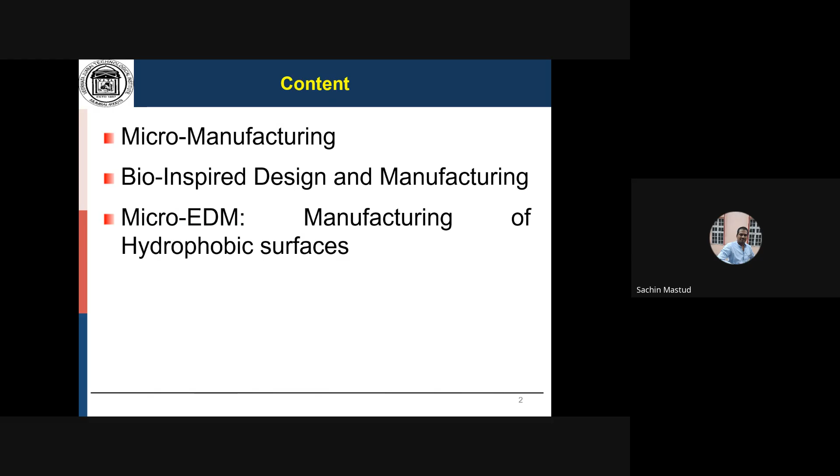So that's how there are many limitations of conventional machining processes, including that the tool must be harder than the workpiece, the tool must be very strong compared to the workpiece, and there is a relationship between tool motion and the workpiece. So the geometry you can achieve in conventional machining is limited.

Based on that, now we are moving towards micromanufacturing and 3D printing processes, wherein we have more liberty over the geometry we can achieve. Always remember that the tool is in contact with the workpiece, and that tool is under tremendous pressure and stress. You can see the machining force is coming on a very limited area. So although the force is high, the contact area is small, so the pressure is very, very high, and the tool has to bear this pressure. So always remember this, that the tool must be very strong, and it has to bear the pressure.

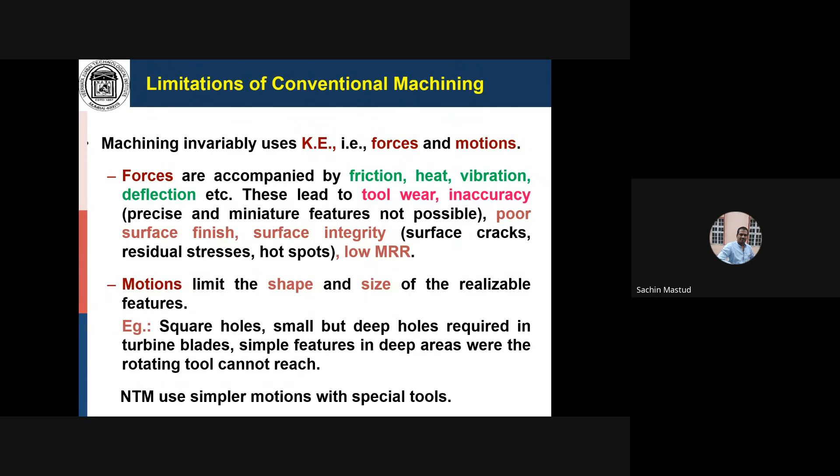If you see the development of manufacturing processes over the last 100 years, we can easily see that each 25 years our accuracy and precision is moving by 10 times. Before 25 years, if you could machine a part to, say, 10 micron accuracy, after 25 years it shifts by 10 times, so now we can machine the part to 1 micron accuracy. Each 25 years we are enhancing precision by almost 10 times - not 10 percent, but 10 times.

Considering that, we can now say that we can easily manufacture meso parts as of now. There is a trend towards the micro manufactured part. Now why micro manufacturing? Why aren't conventional processes enough? Why do we want to move toward miniaturization or micro manufacturing?

Always remember that if there is one mechanical system, and you can get the same function, the same output from a micro manufactured product or system, why would you invest more material in larger systems? For example, if there is one motor, and the same output is given by a small, advanced motor, why would you invest in the large motor, where you save more material and reduce manufacturing sequences? If you can reduce it, always try to reduce it.

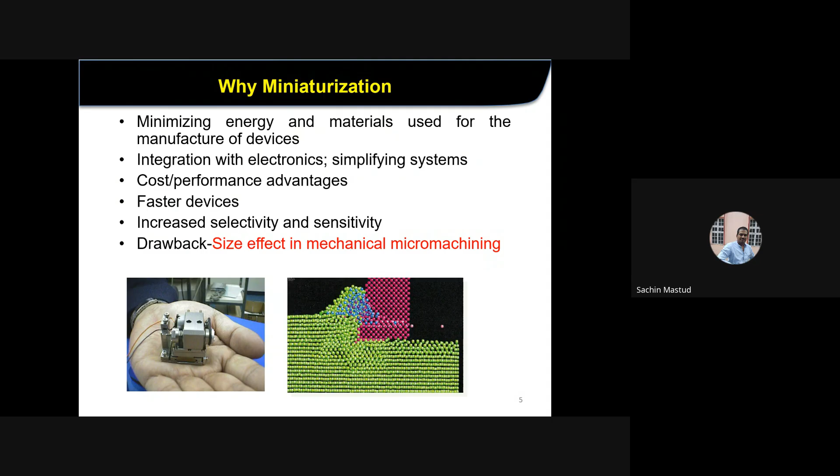Remember, tool size is already reduced, and the amount of energy required is increasing, so it becomes more challenging, because as tool size is reduced, cutting forces increase due to the size effect. So the first important challenge in micro manufacturing is to create tools which can sustain these cutting forces. That is the challenge, but if you can overcome it, the benefits are greater.

So now you will ask, what are the micro manufacturing processes? As such, there is no separate classification of micro manufacturing processes. Whatever process we've been using over the ages, if you scale it down so it can remove material in microns, that would be called a micro manufacturing process. There is no separate branch of micro manufacturing - whatever we are practicing, you just have to scale down the process.

Scaling down the process means the impact or mechanical energy during the process is reduced. For example, if you are turning a large part on the factory floor, if you reduce the depth of cut to less than 999 microns, it would be called micro manufacturing. There are no separate processes in micro manufacturing - only the size of the feature being machined is less than 999 microns, and that is called micro manufacturing or micro machining. So the general classification is macro fabrication or machining, and micro fabrication. Within micro fabrication there is micro machining and micro/nano finishing processes.

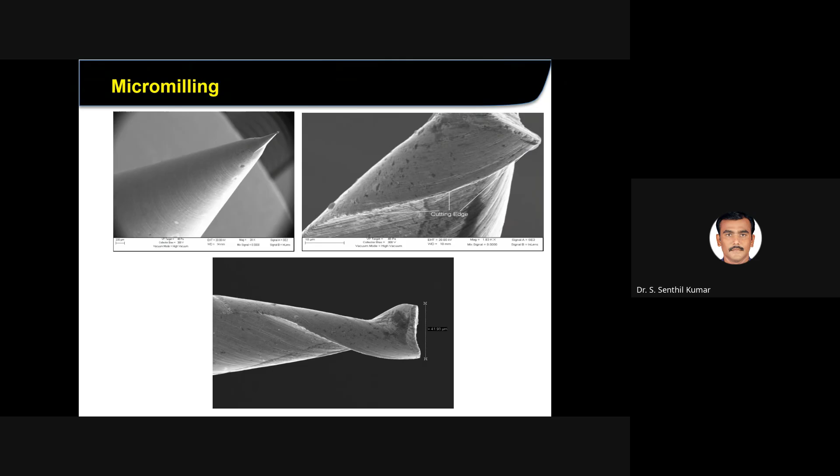So as I mentioned, the foremost important challenge in micro manufacturing is the usage of the tools and getting those tools available at your facility. As of now, we are lucky that these tools are easily available in India. 10 years back, we had to import those drills from Singapore, and the size of these milling cutters and drills is so small and so expensive that half of the drills would break in transit only, because they are so small.

Someone has unmuted. Can he or she mute? Yeah, I've taken care. Dr. Sachin, you proceed.

Okay, so that is the first challenge. The image shown here is close to 40 micron, correct? The bottom one is actually a milling cutter. It's 40 micron, and you can see that the flutes are machined on the 40 micron. 40 micron is half of a hair size. On half of the hair size, flutes are machined, and now you expect that this fellow will cut the metal. That is more challenging again.

Another challenge in building micro machines is how we normally calculate the RPM required on the machine. For example, if you go to the workshop and carry out a turning operation, how will you evaluate at what RPM the workpiece should be rotated? You will evaluate that based on the simple formula, V = πDN/1000. V is the cutting velocity. For carbide and mild steel, let us say the cutting velocity is 100 meter per minute. Based on that, you will evaluate the RPM.

Now, conventionally, let us say that for turning the 10 mm workpiece, the RPM would be around 3000 RPM. But if you reduce the drill size by 100, your RPM will obviously increase by 100, and it will become sometimes 2.5 lakhs RPM, which is not technologically feasible. It means that you will rotate this drill at 2.5 lakhs RPM, correct? Which, as of now, is not possible.

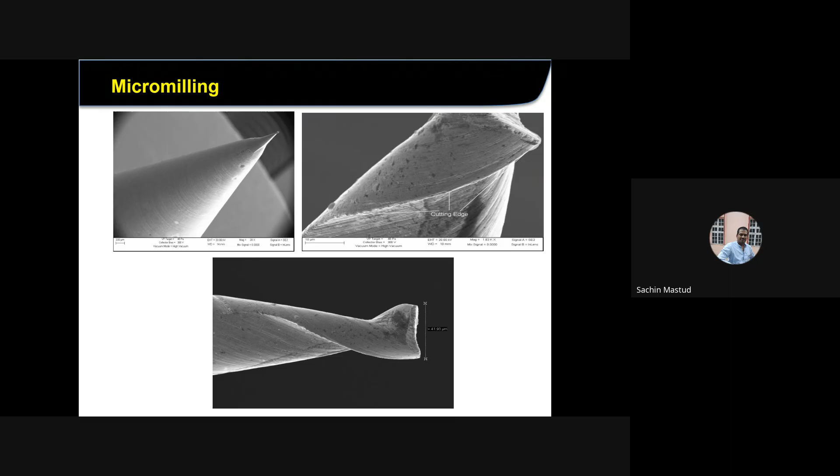Irrespective of those challenges, there is a good thing that in India we are now manufacturing the drills or the milling cutters. There is one company in Himachal Pradesh. It is Axis Micro-tools. Axis Micro-tools has developed the capability to manufacture this drill in our own country, and that's how the cost of these drills is now reduced. Remember, a drill size of around 80 micron can be easily manufactured nowadays in India, which otherwise we had to import from Singapore 10 years back.

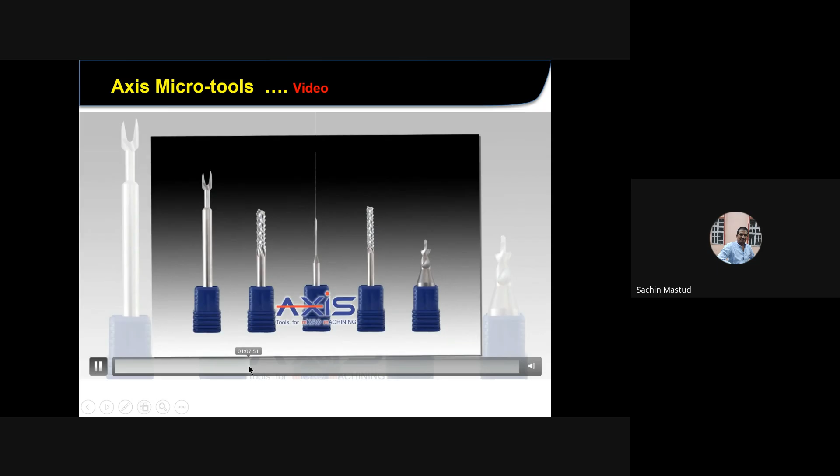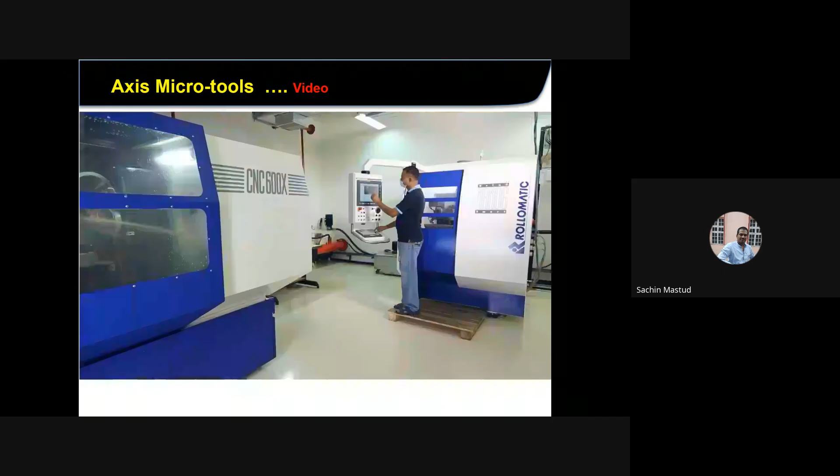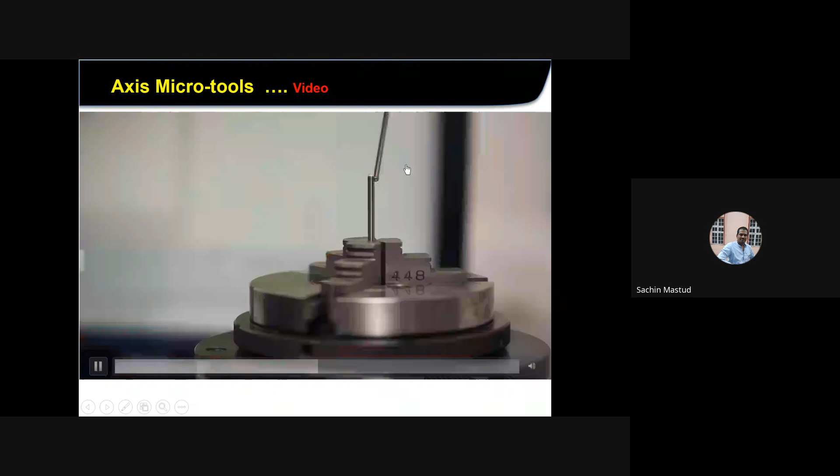So general manufacturing of this tool is always, first of all, a design. Okay, correct? You have to design the flutes, shanks, and then there are 5-axis grinding machines which will cut those drills and the milling cutters. You can see the size of the drilling and milling cutters. So online metrology has to be followed so that you can measure the diameter of the drills. So these are the drills; non-contact measurements you have to do. All these are possible in India, and we are now able to manufacture the micro drills and milling cutters.

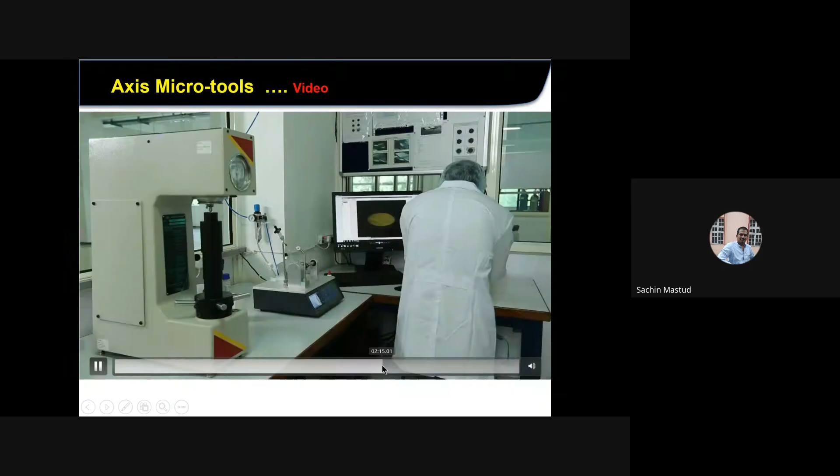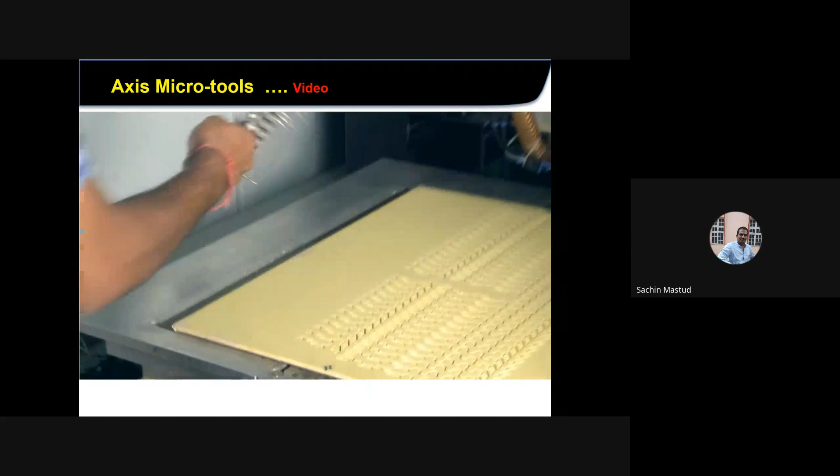Okay, so this is a good company. Axis Tools are there, and their tools are almost reliable nowadays. And earlier, half of these tools used to fail in transit only, in transportation only. But now reliability is good, and we can use these micro drilling or milling tools in our setups.

Only thing is that normally you cannot mount these micro drills on, let us say, the drill machine available in the workshop, because you have to rotate these milling cutters or drills at very very high RPM, and at high RPM it has to be balanced, correct? Otherwise, see, the diameter is only 50 micron. Even if you slightly touch the workpiece on the cylindrical side, on the periphery, it will break. Okay, so these are the challenges. Irrespective of those challenges, we are now able to fabricate parts at the micron level.

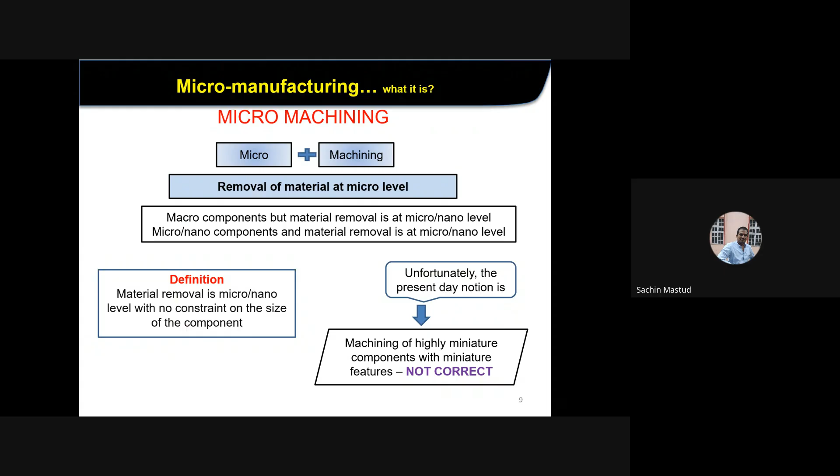Now, by definition, the parts may be large, but as I have defined earlier also, if the feature size you are machining is less than 999 micron, we call that micro manufacturing. Okay, so where will you use micro manufacturing? Basically, micro manufacturing is used to produce micro parts. Now you can manufacture different micro parts, assemble them into micro products, and expect that they will function.

Take an example of advanced cars only. In advanced cars, more than 500 sensors are there, which need manufacturing at the micron level. Be it a sensor which operates, let us say, tire pressure, or which helps us in monitoring the ADAS system. There are multiple sensors. These are integrated in the systems, but for manufacturing these sensors, you require micro manufacturing capability. Okay, so there are numerous examples wherein micro manufacturing is required.

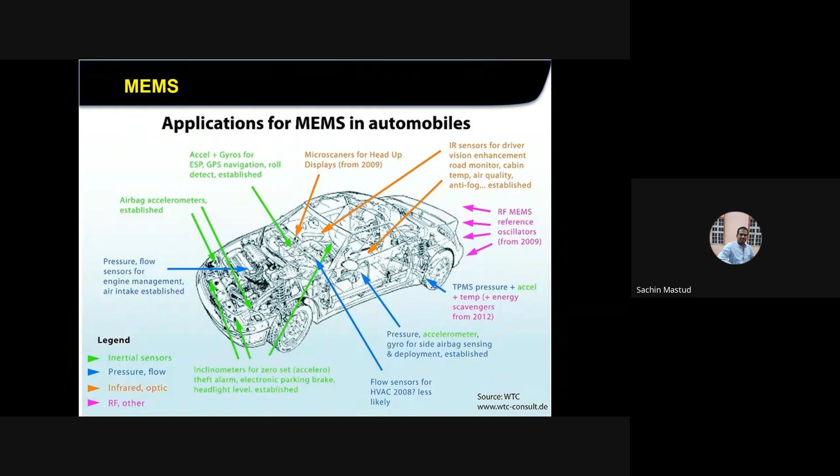Now, to make these features, the milling cutter has to be very very small, very very sharp. Okay, so you have learned in your machine design courses that if the diameter of the shaft is reduced by, let us say, half, its strength is reduced not by half, but it will remain 1/4 only.

It is not a linear relationship. It is a square relationship. Okay, so if the size of the tool is reduced, its strength tremendously diminishes, correct? So size is reduced, and you expect that that fellow will cut the metal and realize such beautiful features on the metal. Okay, such is the challenge, but yes, micro manufacturing processes have reached the competency level, and you can easily manufacture such features in your own laboratories.

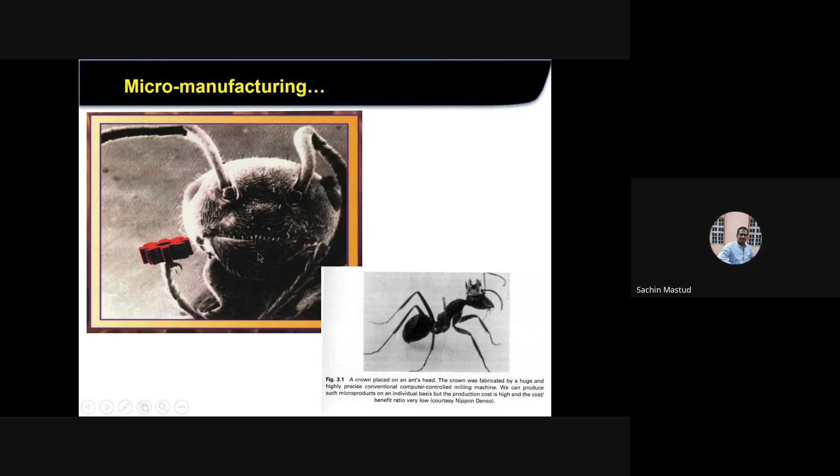Okay, so now this covers the micro manufacturing. We have reached where we can manufacture very small parts, be it the crown on the ant, or this ant holding the gear. Although it was transparent, it is an actual image. Okay, just to notify, it is colored with red, but otherwise it's the actual image. Okay, such features you can machine.

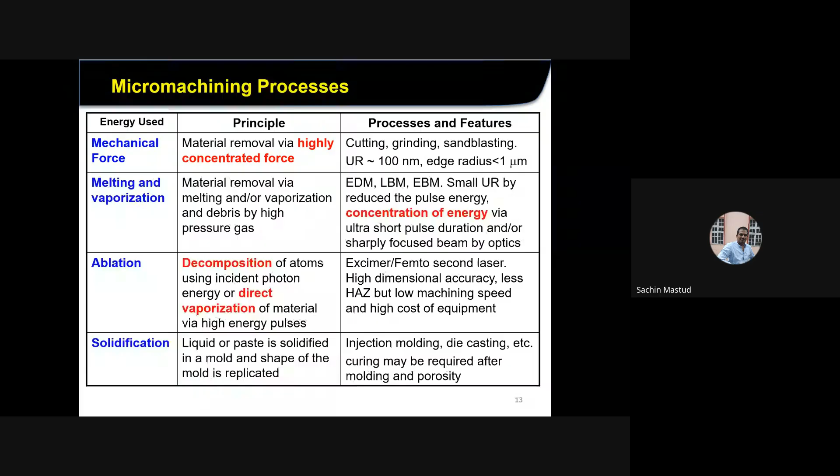Again, to summarize, micro manufacturing uses the same principles which are there in conventional machining, be it the use of mechanical force, be it melting and vaporization like in laser, EDM, EBM processes, or ablation like in the excimer laser or femtosecond lasers, or be it die casting or injection molding processes. So there is casting, there is micro casting, there is welding, micro welding, rolling, micro rolling. Correct. So all these processes, and dissolution, which is used in the ECM process or photochemical machining process. Similar principles are also used in the micro machining process.

Okay, but the only thing is that it is difficult because tools are creating challenges, and importantly there is always the presence of the size effect. Okay, so different types of energies are used in the manufacturing, like mechanical, chemical, electrochemical, or corrosion with the photochemical. These are the methods and the processes with which micro manufacturing is working. I will not spend more time because it is almost similar to the classification of our unconventional machining processes.

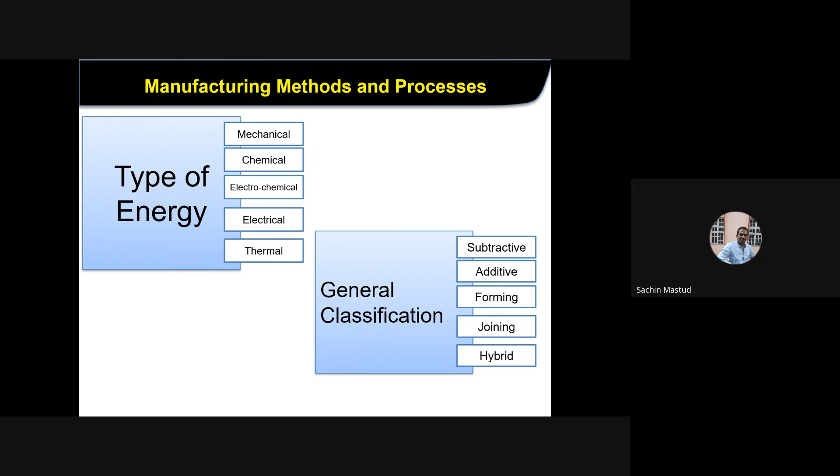Correct. So now moving ahead, let us say that we wish to do the micro manufacturing process, but as I mentioned, you require a dedicated machining facility. So I worked on this almost 7-8 years back at IIT, but still IIT Bombay has a good micro machining facility. There is a micro machining cell available in IIT Bombay, wherein they have different machines. Out of them, there is one machining center. There is a difference between a machine and a machining center. Correct. A machine is dedicated.

In a machining center, with a change in the spindle and tools, you can carry out different operations on a single setup. For example, the same frame can be used for micro EDM. The same setup can be used for micro ECM also. Okay, so this is a machining center, and micro drilling, micro milling, micro turning you can carry out on this same facility. That's why it is a micro machining center.

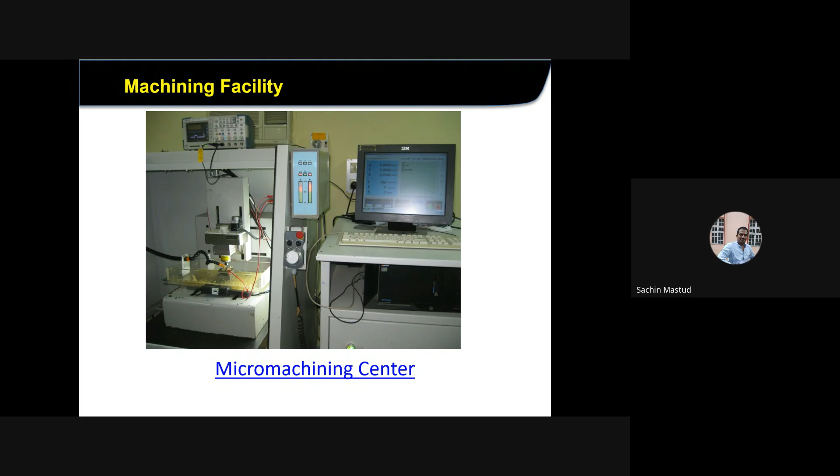Now this micro machining center was previously developed by the National University of Singapore. Professor Rahman is there who developed this center. IIT Bombay imported this machine from Singapore. This was their first machine developed by Professor Rahman. Now there is an advanced machine. This is 100. DT 100 is the machine, but now a 110 version has come, and IIT Bombay has recently procured that machine, and it is active in the micro machining cell. Now, the good thing is that this is Mikrotools. Mikrotools is the manufacturer of the micro machining center.

Now, this micro machining center, as I mentioned, with a change in the tools or spindle heads, you can carry out micro drilling, milling, or micro EDM, micro ECM. All these operations can be done in a single setup. Okay, it is an advanced machine basically. Why advanced? Because it is a vibration proof machine.

Because at the micron level, once you are doing the machining at micron level, even the slightest of vibrations will break the tool. That you have to control. So we'll just go through the video of these Mikrotools. There is a machine in IIT Bombay, the DT 110 machine, which is basically the world's first micro machining center.

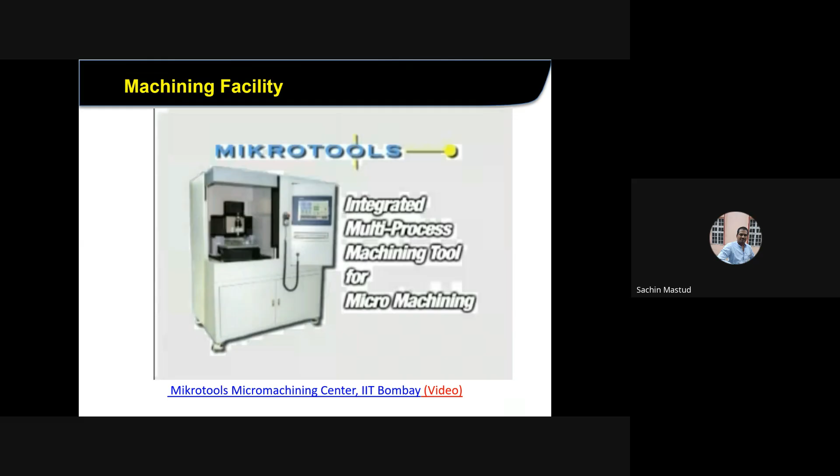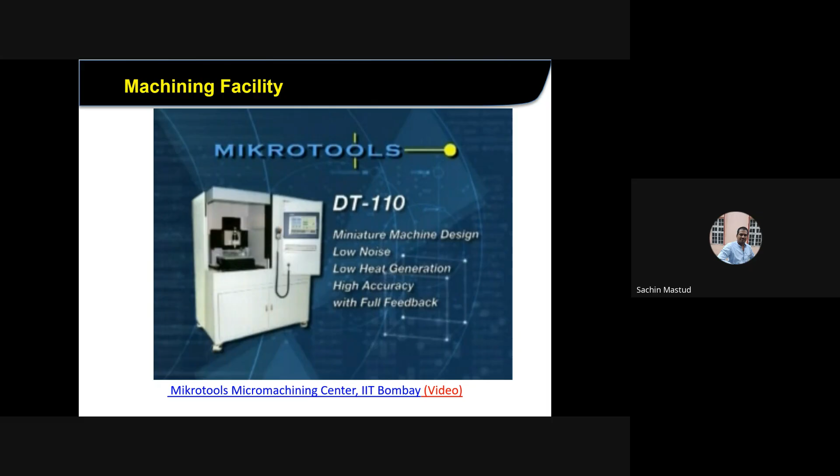This is micro turning being done, micro EDM, wire EDM; this is micro wire EDM. Another thing is that this machine has the capability to measure the dimensions in situ. Means what? You can measure the dimensions when the part is on the machine itself, because you cannot remove the part, machine it, and then again mount it and carry out the processing. You have to measure the part once it is being machined on the machine itself.

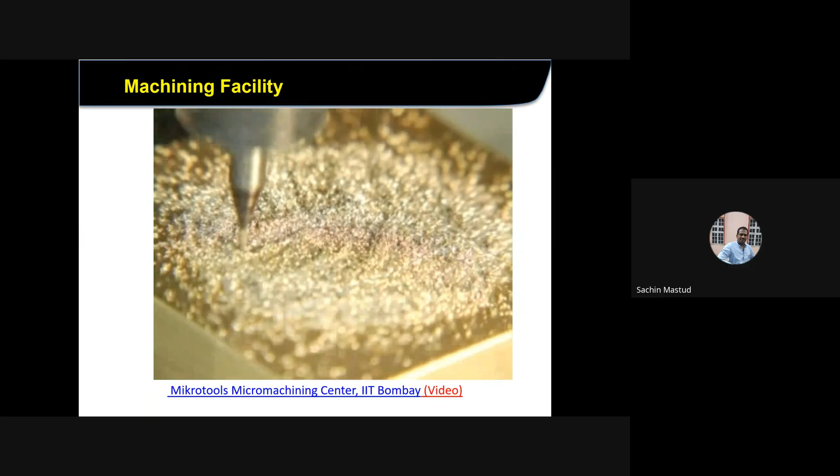Correct? So this is micro milling. Micro milling, micro drilling, all these processes can be done in the given setup only. We'll just move ahead. So what kind of parts can it machine? There is one good example you can see. This is mechanical machining.

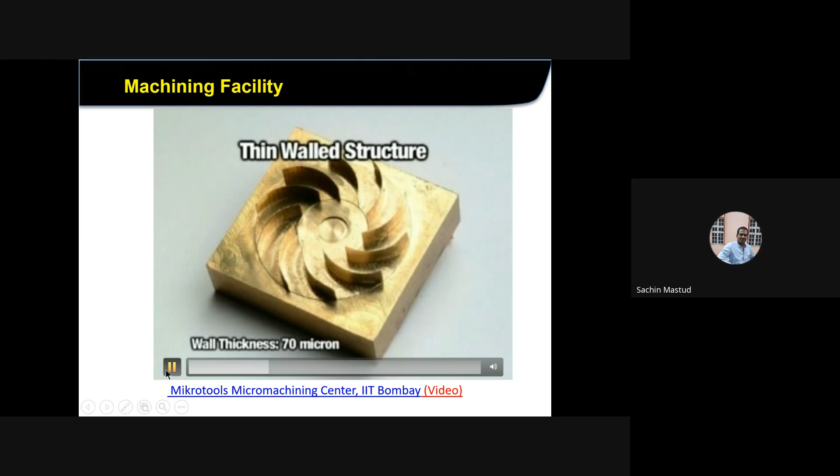What they have done, they have created this thin wall structure, and the width of this thin wall is close to 70 micron, and it is made by the micro milling process. All this material is removed between the thin walls, and you can see the aspect ratio of the thin walls is also good. So these features you can machine on the micro machining center at IIT Bombay.

So at the end there are good examples also. What kind of good examples? See here, this is a micro shaft. It is done by turning. Can you imagine, this is 1/8 of our hair size. The diameter is only close to 11 micron, and it is made by the turning process. So much is the precision and accuracy of that machine.

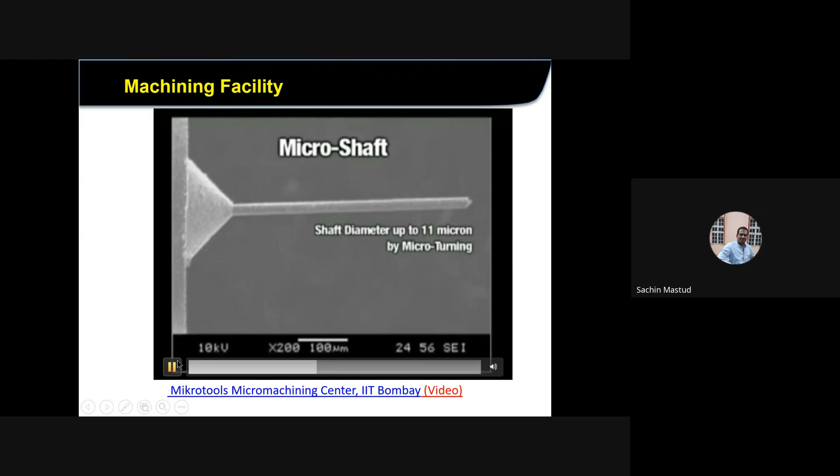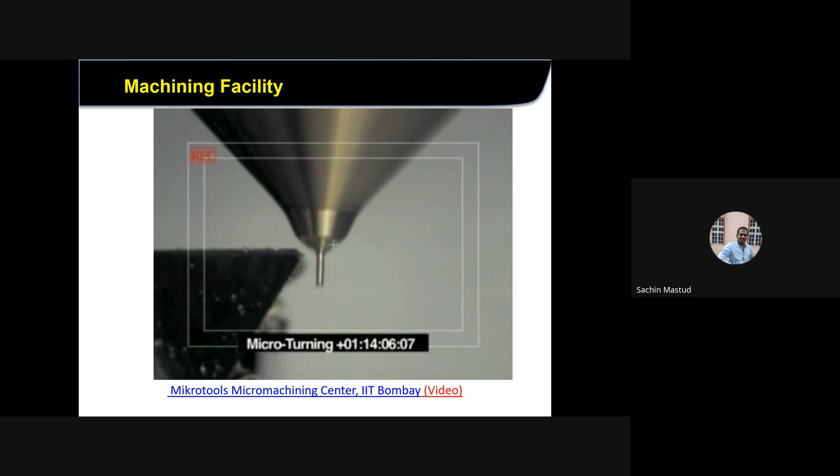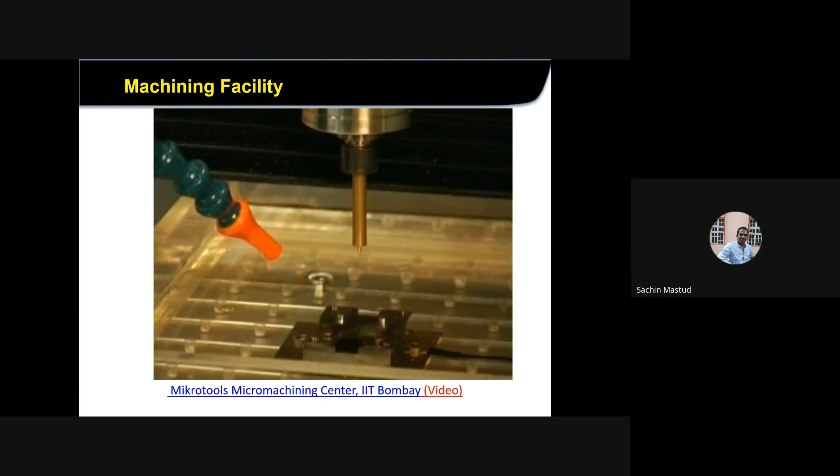Via this system you have to measure the dimensions. There is an online camera; with that you can measure the dimensions. It's micro turning. This is a hybrid process where two setups are there. You can carry out micro turning and then micro EDM, because you cannot remove some of the parts.

So earlier turning is done. Now they will use this for the micro drilling operation, micro EDM operations. You can see the sparks, correct? So it's an EDM process. So like that, with this process you can machine numerous parts with micro holes of less than 6 micron. You can imagine, a micro hole of less than 6 micron is made by the micro EDM process. So we have this facility now.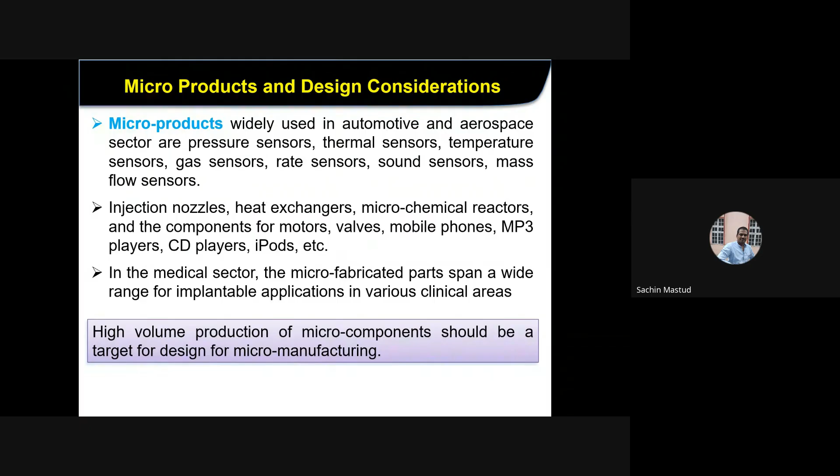At the start of our research, we thought we have the facility, but can we use this facility to create some bio-inspired surfaces? So now we move towards which kinds of bio-inspired surfaces are there, and can we manufacture some of the bio-inspired surfaces in our own labs?

So bio-inspired surfaces have recently gained more traction and importance, in the sense that many applications have evolved by drawing the design from what is already there in nature. Why nature? Because nature has developed itself over millions of years. Some systems are very complex, but nature has beautifully developed them, and we can adapt them in our systems. So there is a separate branch of this called biomimetics, which means mimicking biology or nature to develop different applications, not limited to mechanical, but other applications as well.

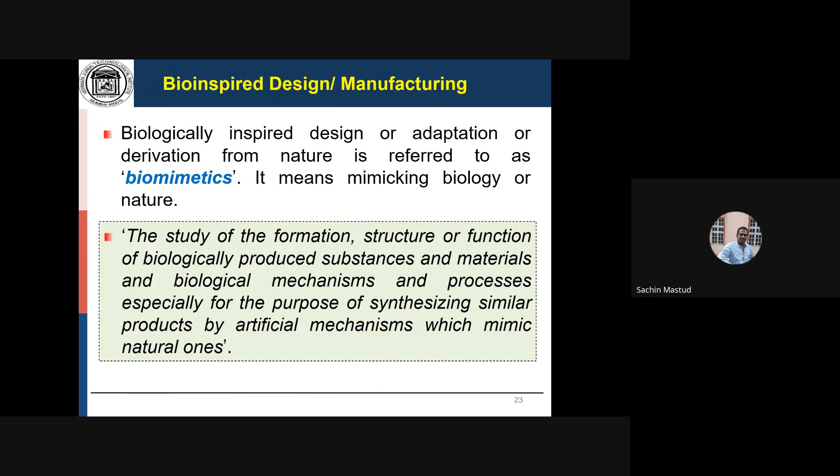So I will go a little bit faster through these slides, just to synthesize what kind of applications can be evolved, and whether we can use these applications in our own laboratories. So bio-inspired surfaces show different properties. Some surfaces have very low friction, whereas other surfaces have very high friction.

Some surfaces have the property of being hydrophobic in nature, some are hydrophilic in nature. So nature has beautifully developed this, and it has developed this by playing at the micron level. If you see the surfaces under the microscope, you will see that each of the surfaces has different morphology. On each of the surfaces, different microscale or nanoscale features are there, which help to obtain different properties.

Which are those properties of interest for us? Can we develop, let us say, a superhydrophobic surface, a self-cleaning surface? Can we reduce the drag when, let us say, a ship is moving in the sea, so that the mileage of the ships would be increased? Similarly, it can be used in energy conversion, or other properties like aerodynamic lift.

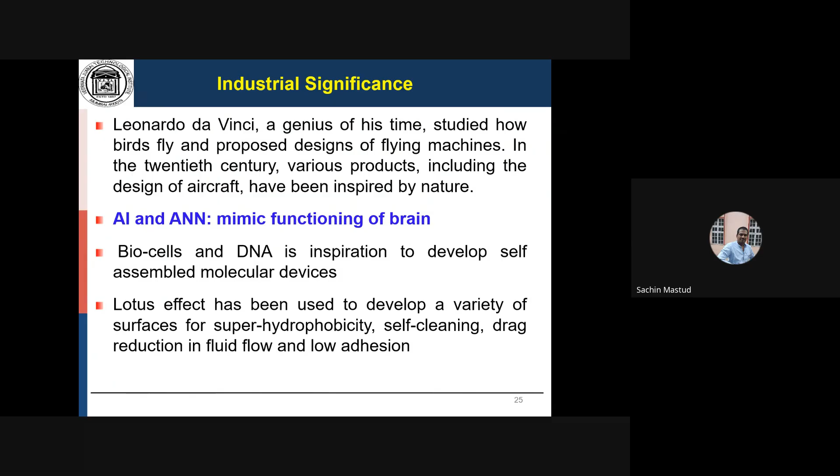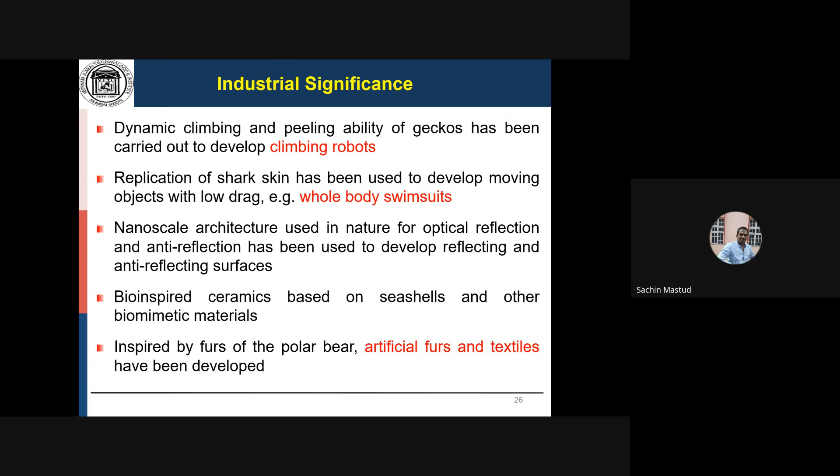What attracted me most is hydrophobicity, which is also called the lotus effect, which I also explored in the laboratories, and I will explain further how we explored that. Similarly, bio-inspired surfaces have very high industrial significance. People are trying to develop climbing robots. Nowadays, Olympic swimmers use whole-body swimsuits instead of the earlier limited suits. From the polar bear, we have artificial furs, and the textile industries are trying to explore those.

So nature is teaching a lot of things to us. We can be inspired by bacteria, plants, insects, spiders, a lot of aquatic animals. For example, aquatic animals have low hydrodynamic drag, so they can accelerate very easily even with the resistance of the water. From birds, we can learn aerodynamic lift, light coloration.

Our national bird is the peacock, correct? It is very colorful, but in reality, there is no color at all on the feathers of the peacock. It reflects light in different directions, and from that, we perceive that the wings have different colors. Actually, there are no color pigments in the peacock feathers. Similarly, we can learn camouflage and insulation properties from birds. Like that, there are many properties we are trying to explore and learn from nature.

But more importantly, superhydrophobic surfaces, which inspired me, and we tried to develop superhydrophobicity in the laboratories. Why superhydrophobicity? Because if you see any surface under the microscope, different surfaces have different geometries. For example, the shark has textured surfaces coated with natural oil, so compared to any large aquatic animal, it has the highest acceleration. This is mainly due to the textured surfaces on it.

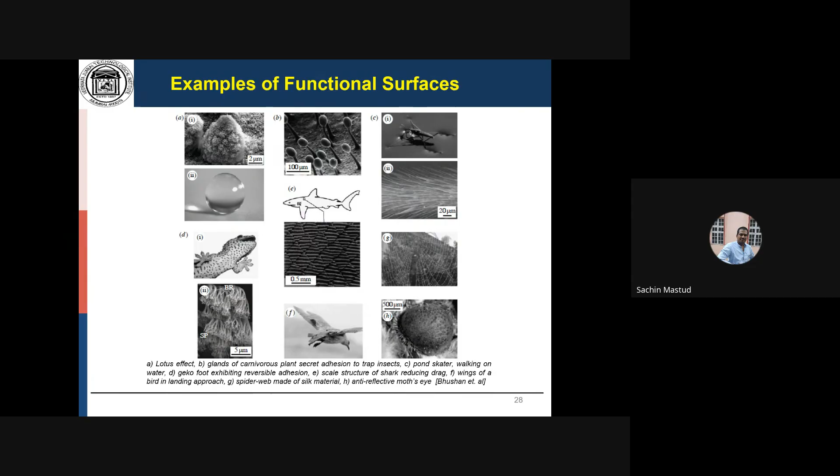So like that, we need to learn much more and explore the properties, be it large aquatic animals or small bacteria. For example, flagellar bacteria rotate at 10,000 rpm. There is a nano motor which works on a proton flow, and the bearing tolerances are close to 20 nanometers, and sometimes the clearances are as small as 1 nanometer. Such features are there, and now people are trying to explore this in their designs.

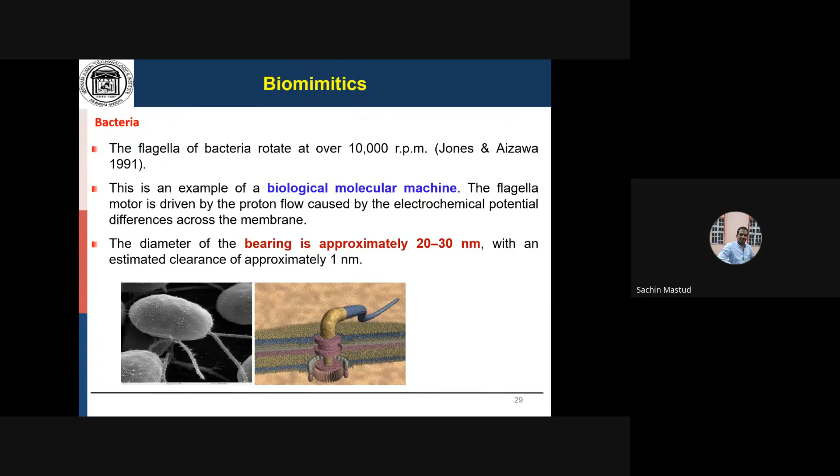From plants we can learn a lot. For example, the outermost layer of the plant is hydrophobic, which, as I mentioned, I explored. This is what inspired me: the lotus leaf, wherein even if it is in the water, water never sticks on the lotus leaf.

If you put some drops of water on the lotus leaf, it will never spread down the leaf. Rather, it will form like a drop and stick there itself. The question is why. The answer is, on the lotus leaf there are micro features, and on those micro features there are nano features. So now we decided, can we mechanically machine the lotus leaf surface in the laboratories? That is our challenge.

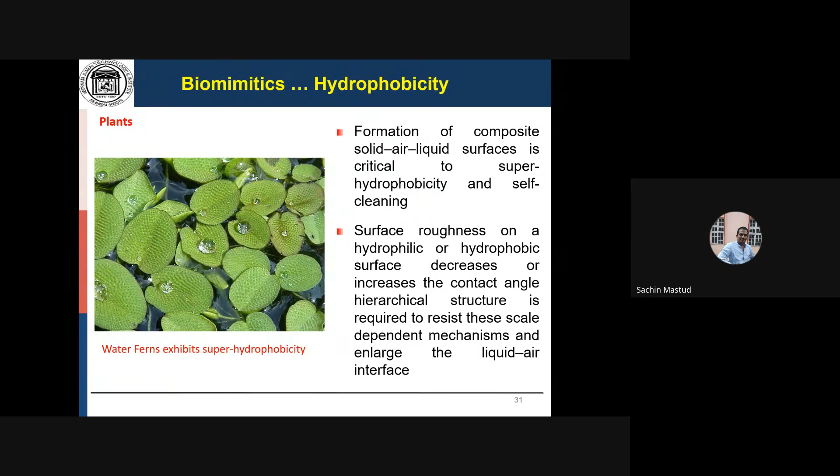Similarly, there are many applications we can explore, like chemical defense of plants, which is mainly due to nicotine. Some sort of nicotine is there, which is also in tobacco. Due to this small amount of nicotine, other insects never attract towards these plants. A similar problem is faced by our defense personnel who work in the forest at the border. They are not suffered by enemies, but more by mosquitoes and these insects. So now people are trying to develop some sort of wear where insects or mosquitoes would not attract towards them.

So like that, the velcro effect is very popular. The pond skater is there, which can stay on the water. Not only stay on the water, but it can carry a weight 15 times its own weight, and only after that will it sink. So if human weight is 100, you can imagine holding 1.5 tons of weight and still standing on the water. That's the pond skater. It shows that nature, mainly because there are antenna-like features on their legs, which spreads the water.

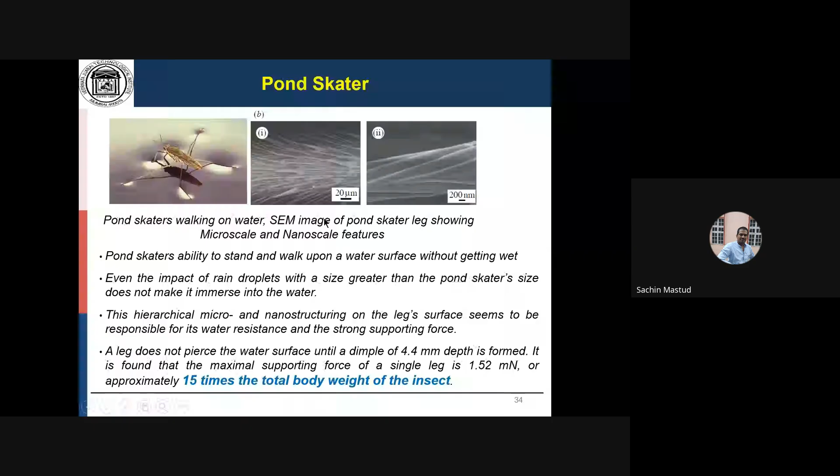Specifically in deserts there is no water, but there is a lot of moisture. And most deserts are very close to the seas. So over the seas there is air flowing, and in that air there is a lot of moisture. But on the ground there is no water. So how does this beetle condense that water?

It keeps its back against the flowing air, and it has micro channels on its body. Once that air flows through these micro channels, due to the large surface area, the moisture in the air condenses. Due to this, water droplets get accumulated on the surface. One good thing is that there is a micro channel, and due to capillary action, this micro channel gets filled, and automatically the drop comes to the mouth of this beetle.

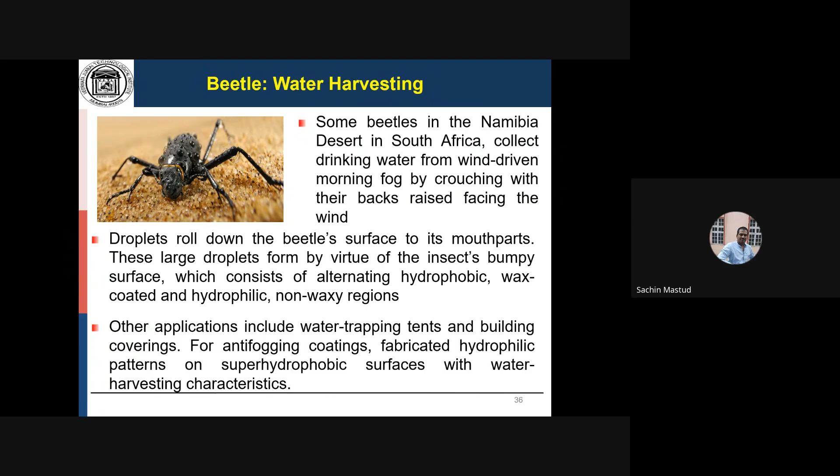So like that, these desert animals are surviving without water by condensing it. Even people are now trying to make a device that can condense the water in the air. Even if 10-15 liters of water can be condensed, it will give enough water for a small family. Like that, people are trying to explore things, like the climbing frog. Our tires are now inspired by the frog, so they can stick on sliding surfaces. Also walking robots. So there are multiple applications.

I will just brush up on those applications. Some birds are oleophobic. What does oleophobic mean? Lots of oil tankers are there, and if some oil leaks from the tankers into the sea, aquatic animals suffer a lot. But it's found that some birds, even if they dive into this oily water filled with oil, the oil won't stick to their feathers.

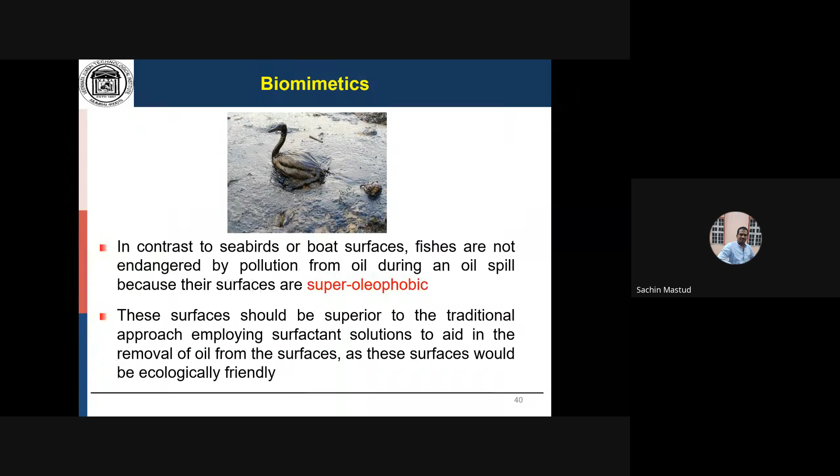Okay, so oil sticks on some birds but not on others. So people have studied why, and based on that, they are now trying to develop surfaces inside the oil tanks which carry the oils, so that once a tank is decontaminated, all the oil can be removed from the surface. Otherwise, some oil sticks there itself, and you have to clean the vessels before putting different chemicals inside.

Okay, so complete decontamination has been done.

Similarly, the flippers of the whales - nowadays wind turbines are inspired from the whale flippers, and it is found that they work even if the air velocity is lesser. They have become more efficient because the angle of attack has increased.

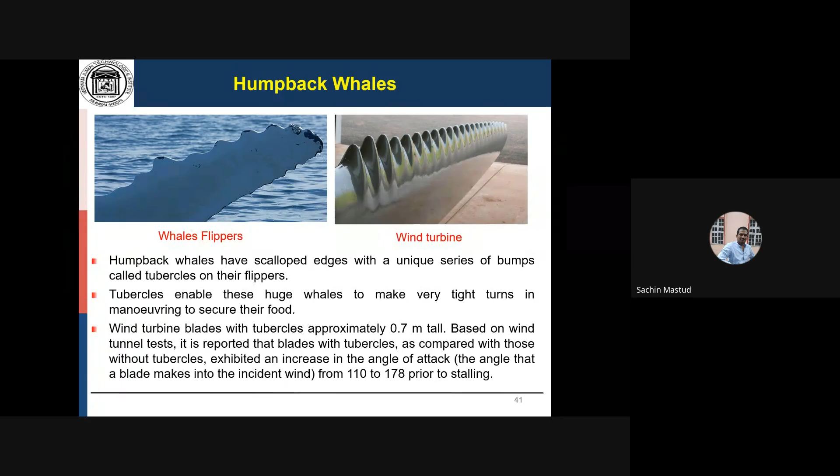Once the bullet train leaves the tunnel, it was making a lot of sound, a sudden blast of sound was coming. That problem was resolved by making the nose close to the beak of the kingfisher, and that problem was solved. Also overall, the trains became 20% more fuel efficient.

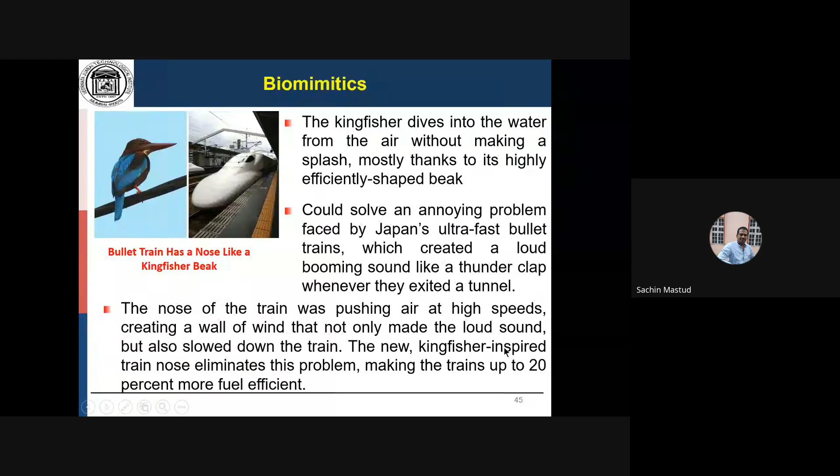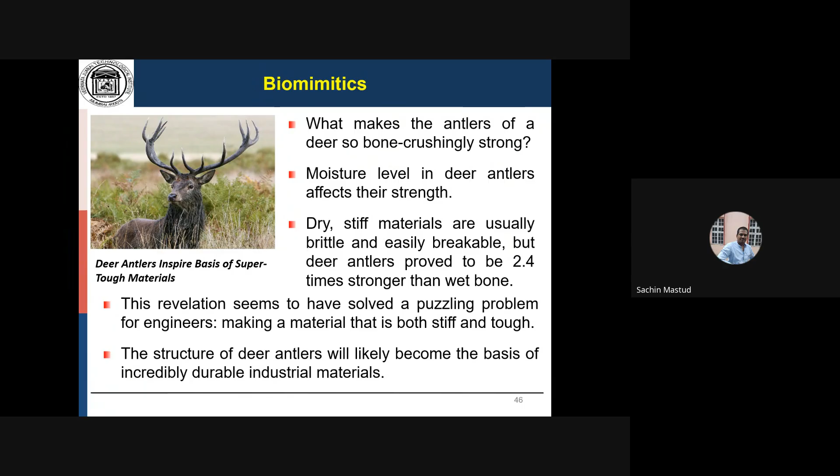Good example: deer antlers have a dry surface, but it is a hard surface. Normally anything very dry is brittle, meaning it is very less hard. But this surface, although very dry, is also very stiff and hard.

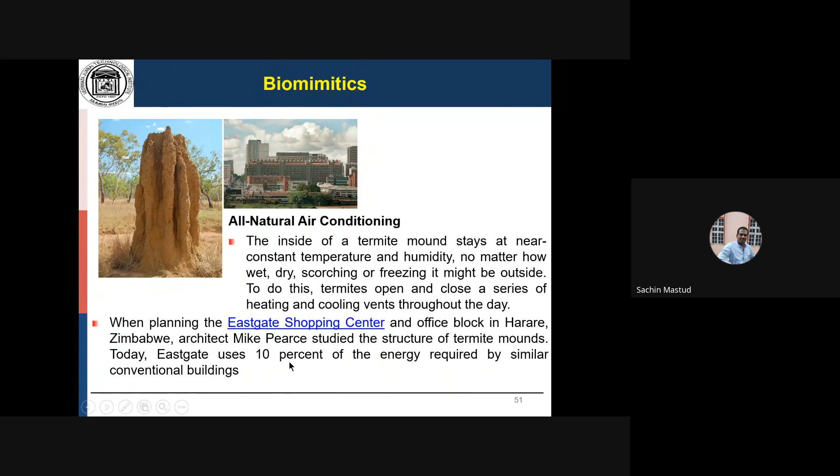There is a shopping center in Harare which is inspired from the termite mound, and it is consuming about 10% of the energy which is normally consumed by this type of building. So there are multiple applications.

The one that most inspired me is the lotus leaf. Now, as I mentioned, we want to create a surface in the laboratory which is inspired by nature. We have taken the inspiration from nature, and now our task is to make the hydrophobic surface in the laboratories.

But hydrophobic surface like lotus means what? Actually, if you see the lotus leaf under a microscope, you will see bumps of around a few microns - semispherical features, and on the semispherical features there are rods. So we took that challenge, and we thought, can we develop a process where we can manufacture high aspect ratio rods as one problem, and can we make a textured surface like a lotus leaf?

Lotus leaf has a textured surface. Texture means what? The same pattern is repeated thousands of times.

So our first task was to make these high aspect ratio features in the laboratory, obviously with micro machining, or can we create thousands of these features on the surface, which we call a textured surface. So these two problems we have taken.

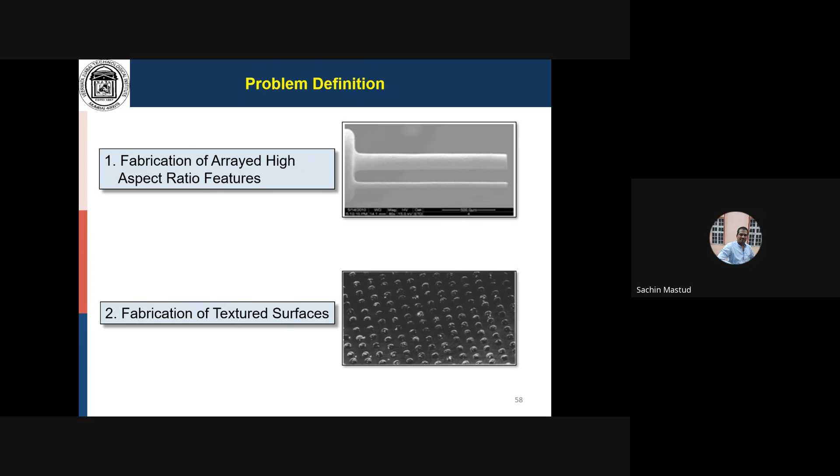Why two problems? Because with the first problem you can solve this - these are high aspect ratio features used, let us say, as the electrode of microbatteries. So instead of a single electrode, there can be multiple electrodes. But how to manufacture these electrodes is challenging.

So we took that as a challenge - let us manufacture that. The first aspect is manufacturing these few features, but the aspect ratio is very large. Aspect ratio is the length to diameter ratio being large. So these electrodes are used in micropins, heat exchangers, micro batteries. Also, these are used to capture our brain signals in some biomedical devices.

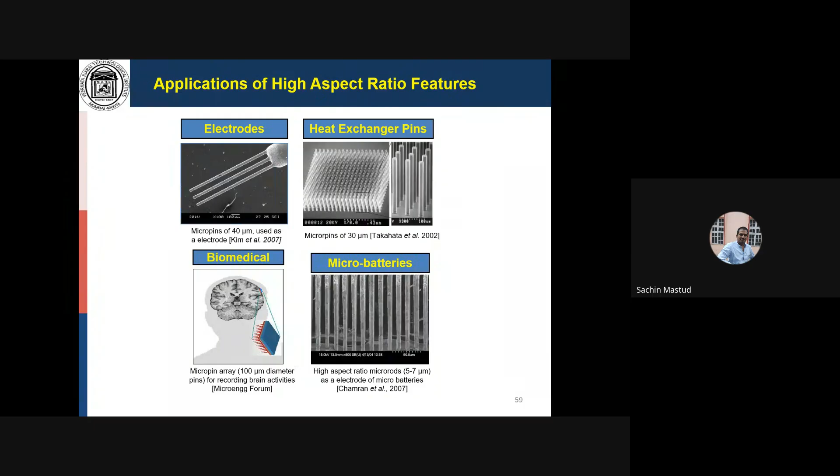So we require that. Existing processes are there, like for example you can use the milling cutter - make a cut in this way, horizontal cut, vertical cut, you can make a post like this. But you know how challenging it is with the milling cutter, because as I started with the challenges in micro machining, this milling cutter is so small, you will cut only one post and it will fail.

Other way, you can make a micro wire EDM cut in one direction, cut in the other normal 90-degree direction. You can make features, yes, but different features you cannot machine with this process. So with these challenges, we said, can we develop a process which is our own, developed at IIT Bombay.

I was working there for my PhD work with Professor Suhas Joshi and Professor Ramesh Singh. Under their guidance, we developed this process, which we called the reverse microEDM process.

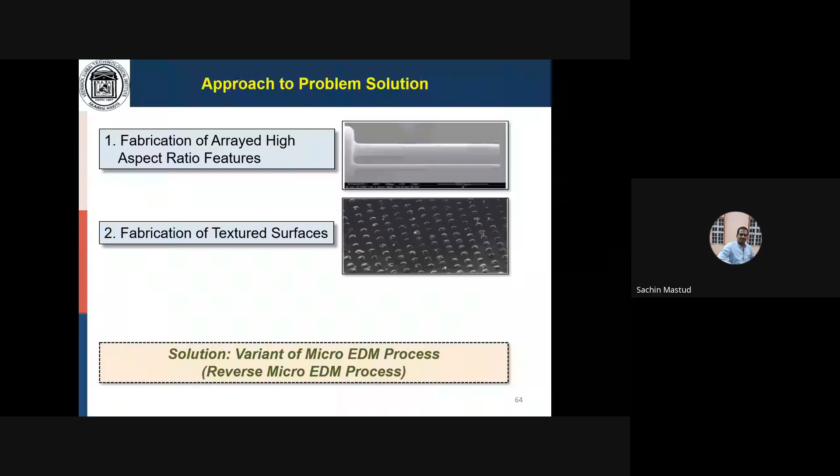So how will you make these rods in the reverse EDM process? Initially, with rods you can machine cavities. So we have reversed this: initially we take cavities and then make the rods. So the difference between microEDM and reverse microEDM is the tool electrode.

See the geometry of the tool electrode. In the earlier case, it was cylindrical rods, and you make cavities. Here we have used cavities to make the rods. Initially we can make the required cavities by the laser process or micro drilling process.

Let's imagine you have made 100 micron three holes on the plate. The workpiece is aligned on the cavities, so these three holes are there. Once you do the micro EDM, a spark will generate whenever there is a metal to metal interface, and you will make these three rods.

So you keep on machining. The material gets eroded from this area because there's metal to metal contact. Wherever there is a hole, you will get a rod out of that hole. So the cross section of this rod would be equal to the cross section of the hole. You can play with the cross section of the hole and get rods of different cross sections. Put multiple holes, and you get multiple rods.

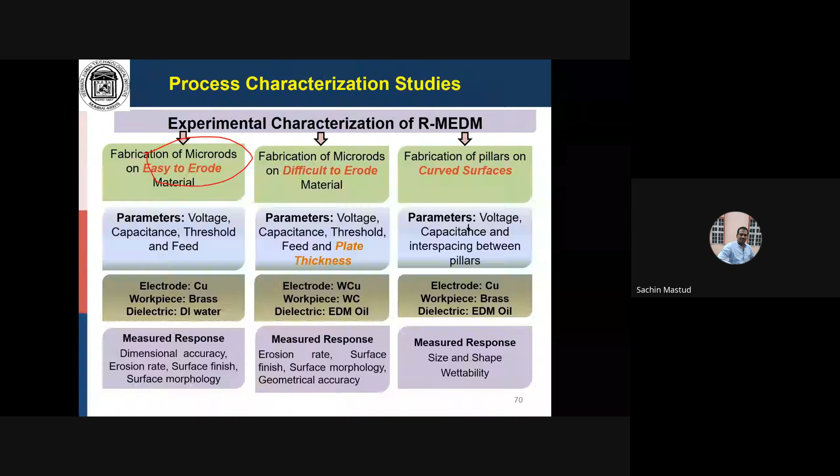So initially we started machining with softer materials like brass, and we took only 2 rods. If you recall, our objectives are two: one is to make rods of high aspect ratio, and second is to make a bio-inspired surface which is super hydrophobic.

In the first year of research we could only machine a few rods - here a rod of 400, a 400 square rod, and a 200 diameter circular rod. I took a plate and made one square hole of 400 micron and another hole of 200 micron, and based on this 400 square and 200 circular hole, I made these 2 rods.

Then we quantified what are the important processing parameters. Initially we played with the processing parameters. But what are the results? Results were like 100 and 200. Expected was 80 micron, but you can see somewhere it is 50 micron, somewhere it is 231 micron. Expected was 80 micron, correct?

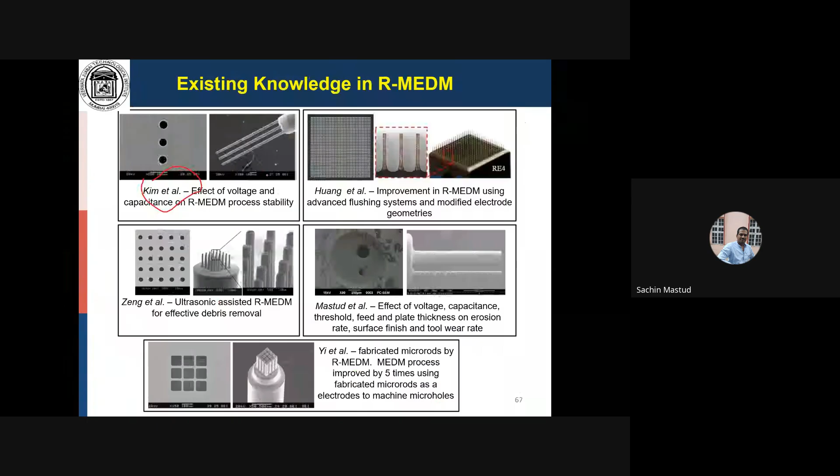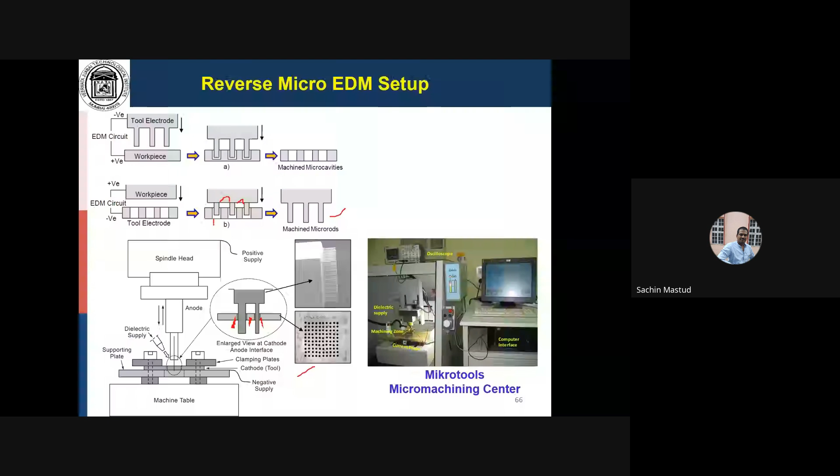So you can see a lot of taper is there on the surface. Why is there a lot of taper? Because during machining there is sparking, and due to the sparking the hole was also elongating. As the rods are getting machined, the holes also get elongated, and that's why there is a taper on the surface. But somehow initially, with a lot of effort, we were able to manufacture only 2 rods, on softer material. We quantified, we played with the process.

And here I would just suggest that you always try to make the problems very primitive at this stage. We took brass material. Our objective was to make thousands of rods, but we started with manufacturing only 2 rods, on softer material. Once we were more confident in the process, we quantified the percentage error in the diameter. You can see a huge percentage error in the diameter. 80 micron we expect, but the errors are 60 percent.

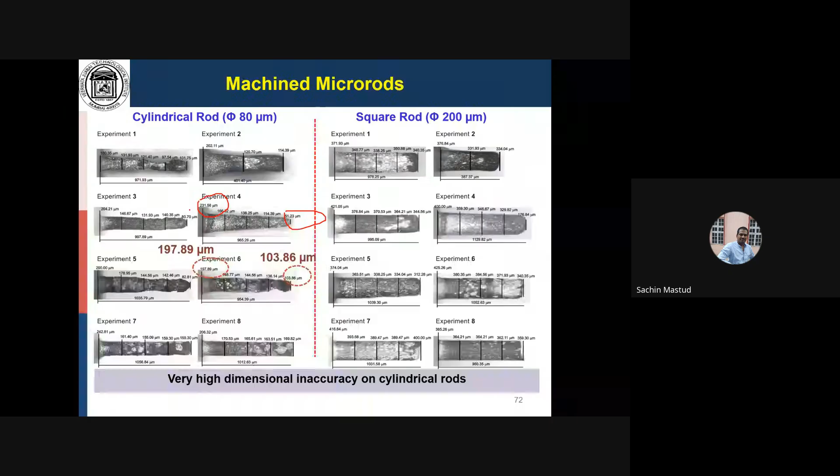Correct? So we expect a diameter of 80 micron, but we are getting a diameter of 120 micron, like that. So a lot of defects were there, correct? Although we expect a single rod size, you can see the diameter here is 51, here it is 231. So a huge difference. But yes, somehow we machined it, we got the knowledge, we quantified the surface finish, and we understood where the process is stabilized.

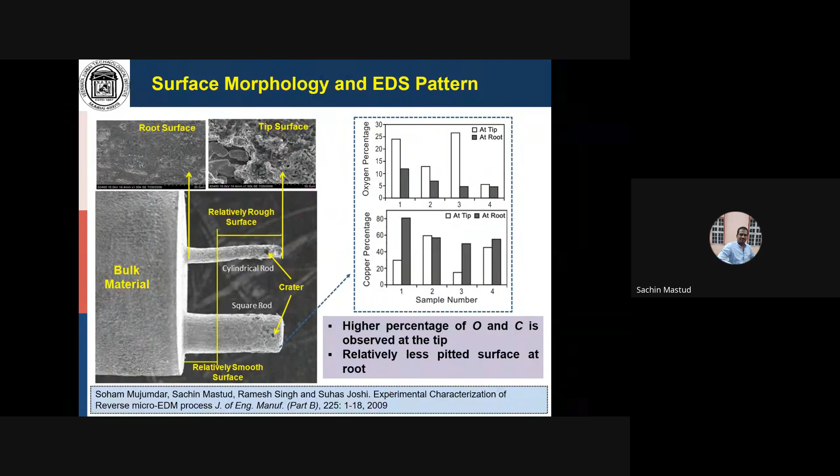We were able to publish this paper in 2009, much earlier, in the Journal of Engineering Manufacture Part B, about the introduction of reverse micro EDM to micro manufacturing researchers. What is this reverse EDM? We quantified that. After we got the significance, we said, let us make it more challenging. Instead of machining these rods on brass, let us make these rods on tungsten carbide. So the anode material, the workpiece material, is tungsten carbide.

Tungsten carbide is a material of high melting point, close to tungsten, about 3200 is the melting point. So again it posed a lot of challenges to us. Earlier we were machining brass with the copper electrode. Here also we tried machining tungsten carbide with the copper electrode, but we failed miserably. The second challenge is that for the cathode, the thickness of foil cannot be higher, because we have to make a drill initially and use it to make the holes, make the rods. We cannot take thick sheets of metal. We need to take foils, make initial holes on the foil, and use that as a tool to machine the workpiece. So we failed miserably.

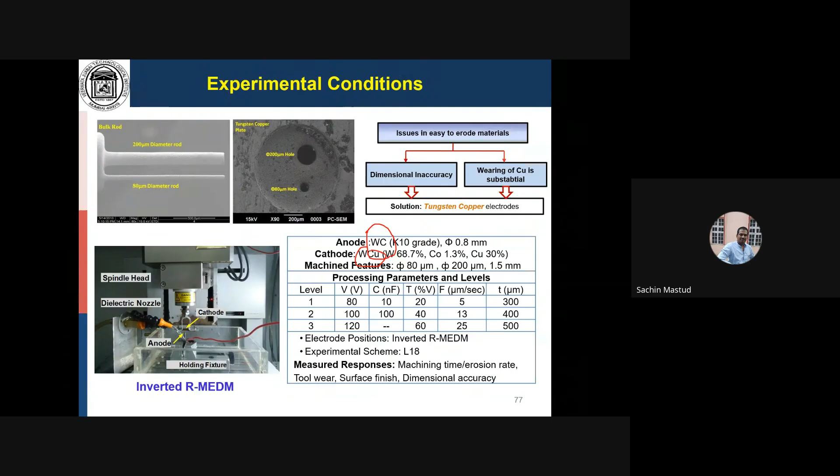We explored many materials, but ultimately we got it. We got success only when we used tungsten copper as the electrode material instead of copper. So we cut tungsten carbide with tungsten copper. Again, we quantified, and it was better compared to the earlier case. Here the diameter is reduced, but the dimensions achieved on the rods are very, very good. We were able to machine rods of around 70 micron, and see the accuracy. These are the diameters of the rod: 70.3, here 77.4.

We could perfectly make these rods in the workshops. But again it was very primitive. We don't expect 2 rods, 3 rods. We make thousands of rods, so that it is a biomimetic inspired surface, a lotus leaf kind of surface. But those were also significant results, and we were able to publish them in the International Journal of Manufacturing Technology and Management.

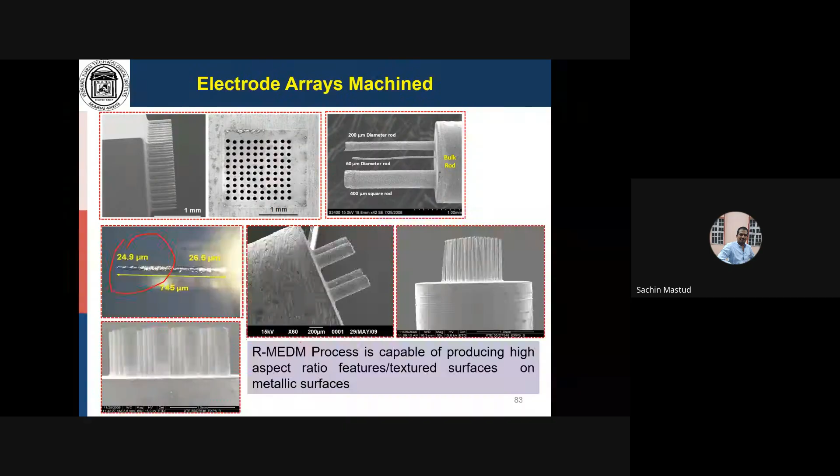After that we also tried to make it on curved surfaces. How small can we go? We can go to around 24 micron also. All these features are machined at IIT Bombay only. But again the ultimate aim was thousands of rods. But before going to thousands of rods, we were interested in comparing the processes, reverse EDM and micro EDM.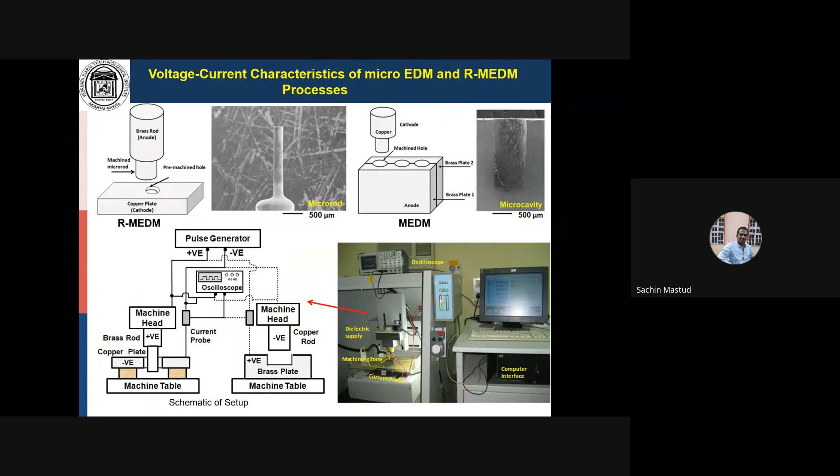What is the comparison between them? Specifically, for those who know EDM, the best way to do it is to capture the voltage and current signals and then measure them. So we quantified the voltage and current signals using this oscilloscope and the current probe, and we compared reverse EDM and micro EDM.

We found that yes, there is a difference due to the inherent nature of material removal, because in reverse EDM you are machining the rod, and in micro EDM you are machining the hole. So based on that, the voltage and current signals we are getting are different for the different shapes. We quantified those results, and we were able to present them at one of the ASME conferences in the US. We could publish these results.

But ultimately our aim was the lotus leaf, as I mentioned. Again, the lotus leaf is not easy. It has thousands of micro rods. If you see this lotus leaf under a microscope, there are rods, and on these rods there are nano rods, which we want to create, and there are thousands of rods. In our earlier two papers, we were able to produce only a few rods, but ultimately we need thousands of rods.

And now we are making it more challenging. Initially we did it on brass, the second time on tungsten carbide. Let us make it on the toughest material to erode, which is the titanium alloy, Ti6Al4V, grade 5 titanium, which is an aerospace material. It's a biomedical material. We thought, let us make this titanium material superhydrophobic. But how to make it?

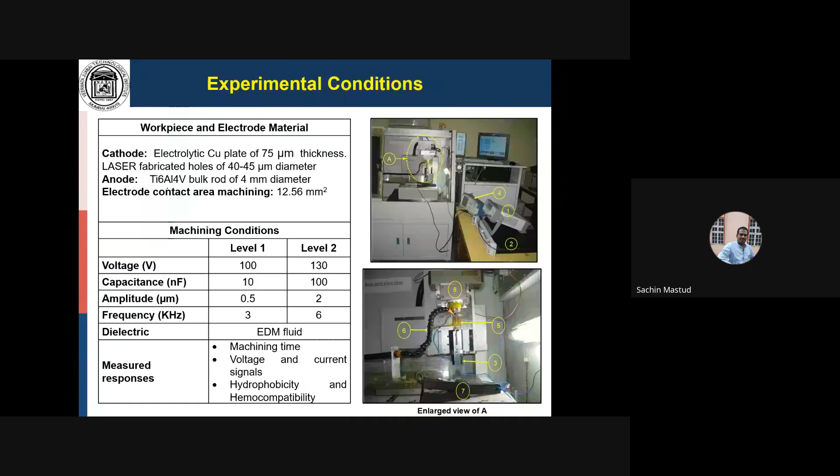What I have taken now is a thin copper foil. There I have made thousands of holes with laser ablation. So on this plate there are thousands of holes. Then I took the plain workpiece, aligned it, and made thousands of micro rods on the surface. Why thousands of rods? Because on the lotus leaf there are also thousands of rods, and due to this it exhibits superhydrophobicity. So the use of ultrasonics leads to making these rods.

This small portion is extended here. You can see this is extended here. Again, this small portion, the same image, is extended here. So you can see this rod is close to 40 microns.

On lotus leaf, it is close to 5 to 10 microns. But yes, it is very close to the hydrophobic lotus leaf. Below it is very difficult because this hole cannot be machined lesser than 40 micron. That is limitations of the lasers also. So none of the process you can machine that. There is always inter-electrode gap. So there is a limitation on this. So smallest we can go is the 40 micron.

So now you can see this is the titanium surface of around 4 mm. This diameter is 4 mm. Remember, initially we were not able to machine even single rod, this rod. But here we have made thousands of rods on the surface. And why thousands of rods? Because we know that this is a lotus leaf geometry inspired from the lotus leaf.

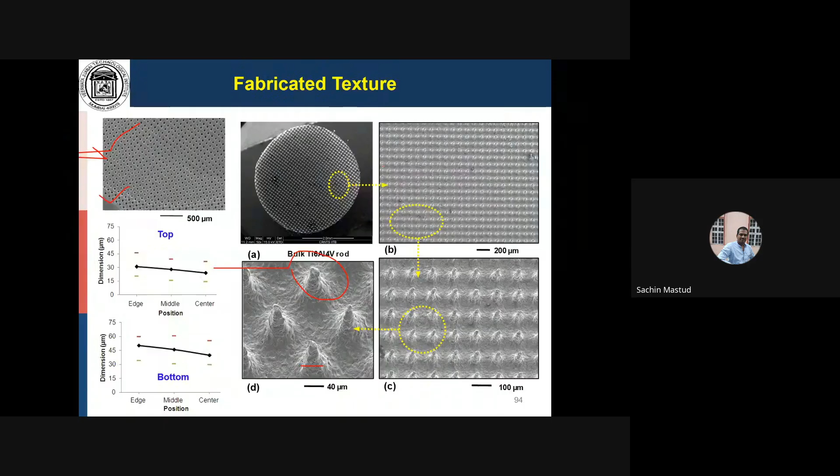See, so in here, this is a textured surface, and on textured surface we have put the drop of the water. Okay, so if this is not the hydrophobic surface, this drop will spread immediately. Since it is hydrophobic, this is a textured surface, the drop is resting, and there is this contact angle, which gives us the indication of super hydrophobicity.

In lotus leaf, you can see this is the same image of actual lotus leaf. On lotus leaf, there are these micro rods, around close to the 10 micron size. Here we have made around 40 micron size. And then we quantified that, and we could achieve around 120 degree. On lotus leaf it is more than 150. So on textured surfaces we could achieve 120, and on untextured surfaces, nascent surfaces, it is very close to 60 degree only.

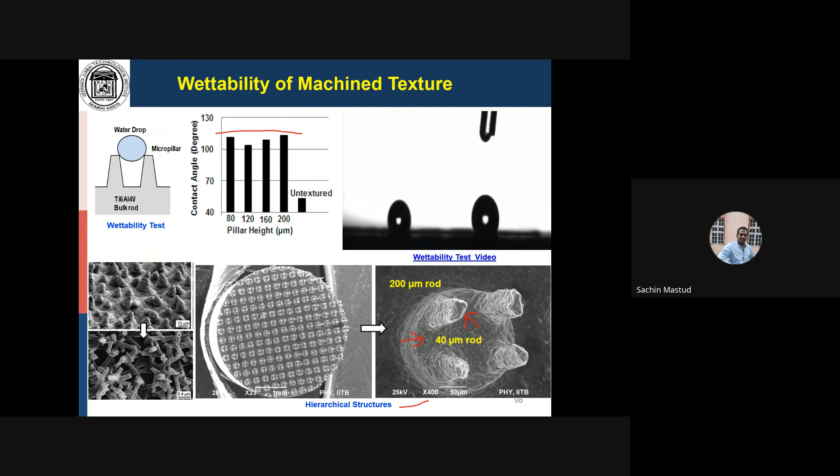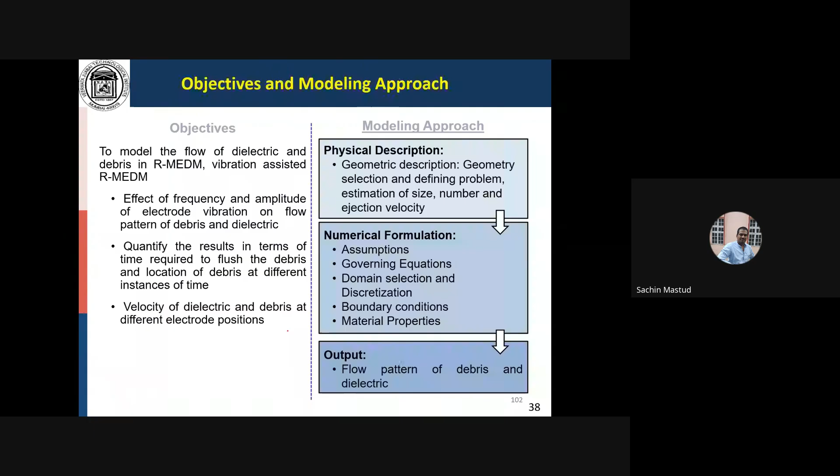Okay, but again, the question is, why is the process improving with the ultrasonic? So to prove that ultrasonic improves the process and improves the debris evacuation, I have done the simulations also. What are the debris? Debris are the particles which are ejected during the process. So I have assumed that we are manufacturing only a single rod, and I have taken an axisymmetric problem.

There is a dielectric in, dielectric out, and in ultrasonic vibration, this plate is vibrating. So assume that there is some spark took place somewhere here. Whatever is in the dotted red line, that is only my area of interest. So that is this zone, represented here. So I assume that somewhere in zone 2 the spark has happened.

In the actual case, thousands of sparks are happening in a single second. But I have assumed that only a single spark is happening. But at that time, nobody knew how many particles would be generated in this single spark.

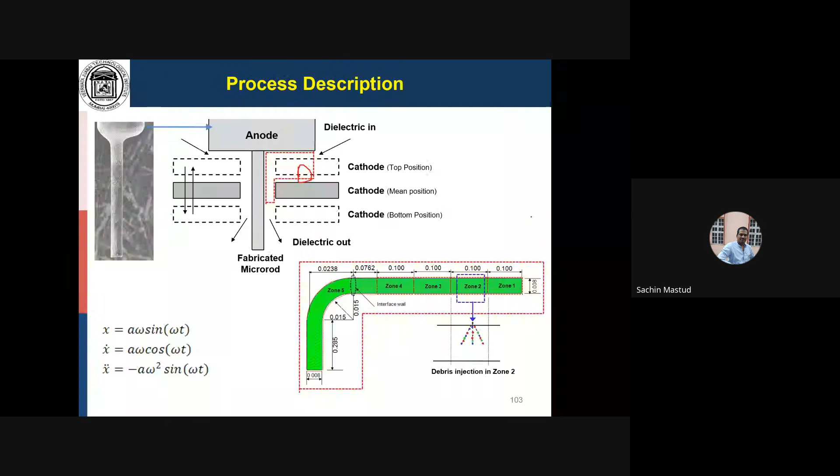So I have developed the mathematical model for that. Actually caught those debris particles under the microscope, measured that, developed this mathematical model based on the energy equation, like what is the energy of the single spark and how much energy is required to generate a single particle. Based on that, balancing that, it is found that around 36,000 debris particles would be generated in a single spark.

Okay, 36,000 debris particles of around 90 nanometer dimensions would be generated. Now, based on that, I have developed the geometry and tried to benchmark this, and then I have done this simulation where I have injected 36,000 of the particles. Dielectric is flowing in this direction and it is ejecting in this direction. And remember, this geometry is vibrating. You can see the gap between these boundaries is reducing continuously, so it is vibrating.

Nobody earlier quantified what is the effect of these boundary vibrations on the particle motions. So in the channel, and this is in milliseconds, you can see here the time. During milliseconds, all those 36,000 particles are distributed in the channel, and due to these ultrasonic vibrations, a lot of velocity is given to these debris particles, which is not there if ultrasonics are not provided. And due to these ultrasonic vibrations only, the particles get accelerated and get ejected from the bottom of this channel, bottom of this pipe.

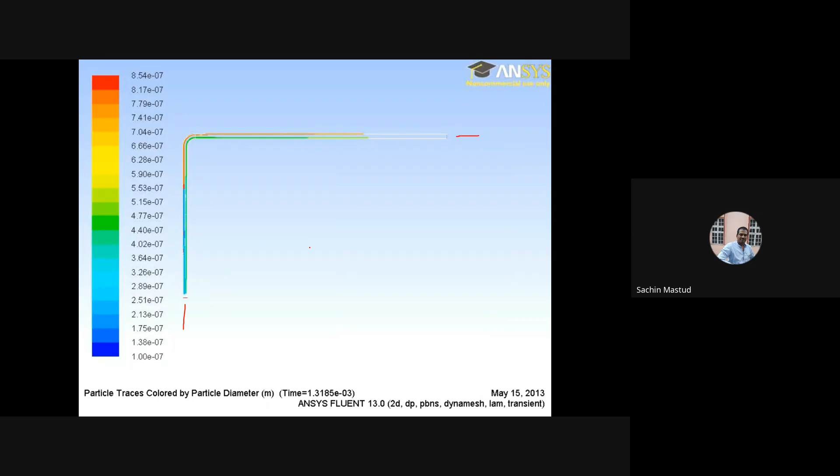So we prove that with the ultrasonic, the particles move forward, backward, forward, backward, but there is a net forward movement. And due to this, the particles immediately escape from the inter-electrode gap, and the short circuiting is avoided with the ultrasonically assisted reverse EDM. And based on that only, you can machine the hydrophobic surface, without which it is impossible to machine.

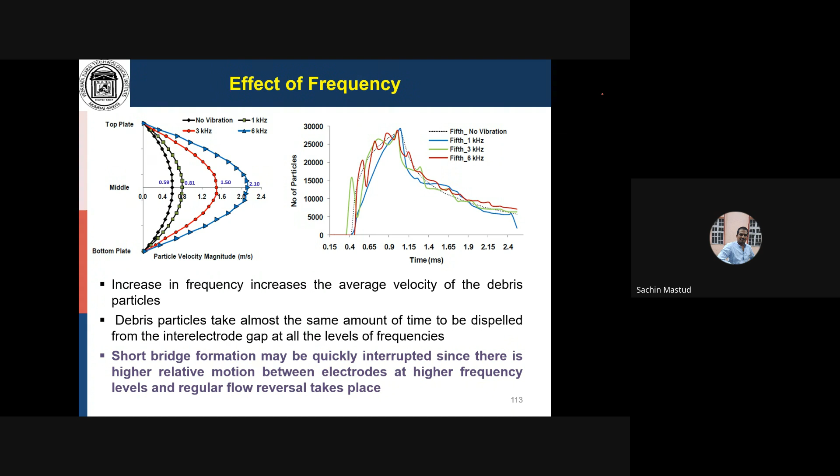Okay, so we quantified the effect of frequency at 1 kilohertz, 3 kilohertz, 6 kilohertz. We did all the simulations, effect of frequency, effect of amplitude also. Without vibrations, the particle velocity is around 0.59. With vibrations, it is more than 2, almost 5-6 times the velocity, and they don't get the time to stick there and cause the short circuiting. That we proved there. And that paper was accepted.

JMMs is one of the good papers in the micro manufacturing domain, and we could publish these results in JMMs. Okay, so this is how we could manufacture the hydrophobic surface, bio-inspired surface, in the laboratories. And as of now, there is no other manufacturing process which can create these textured surfaces on metallic surfaces.

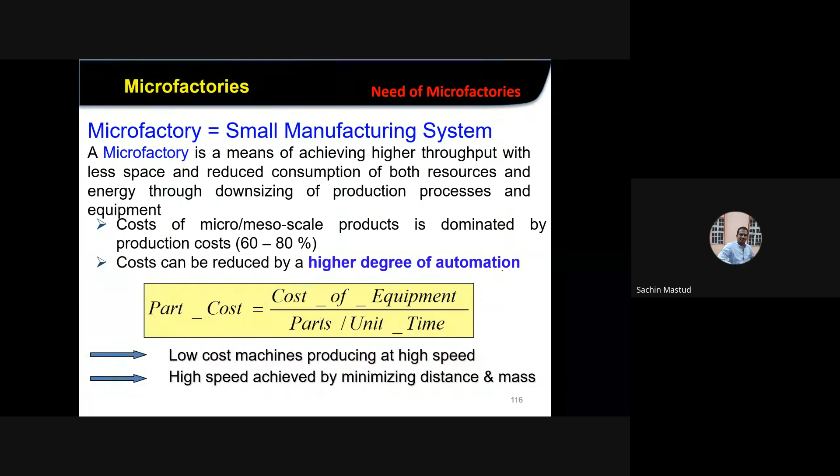Okay, so what is the future of micro manufacturing? If you see the video also, we are manufacturing micro parts with huge machines, normal size machines. So the question is, why, if you are creating such small parts, use very large machines? Can we reduce the size of the machines as well? So that concept is evolving. There are practical examples in micro factories where people have reduced the machine size.

Okay, and the good thing is that the factory size itself is now close to our table size. On the table, you can see there is a milling machine, there is a micro EDM machine somewhere here, there is a punching machine, there is an assembly machine. All are integrated, all are automated. There is a robot with 6 degrees of freedom, rotational and translational, and it can assemble the parts.

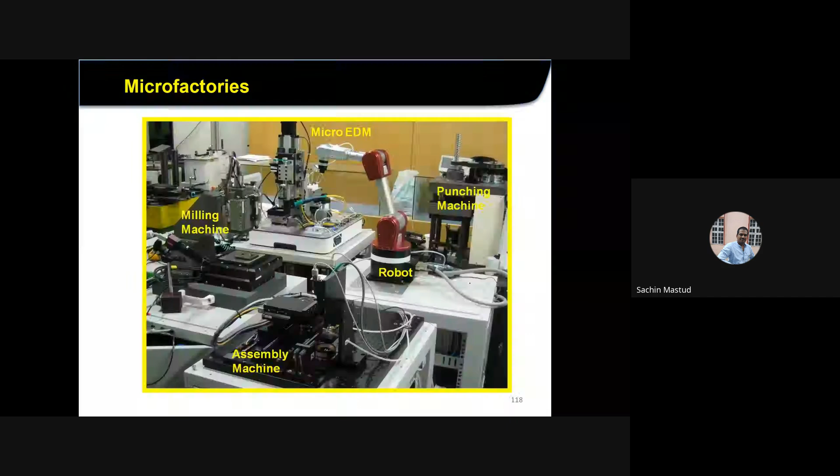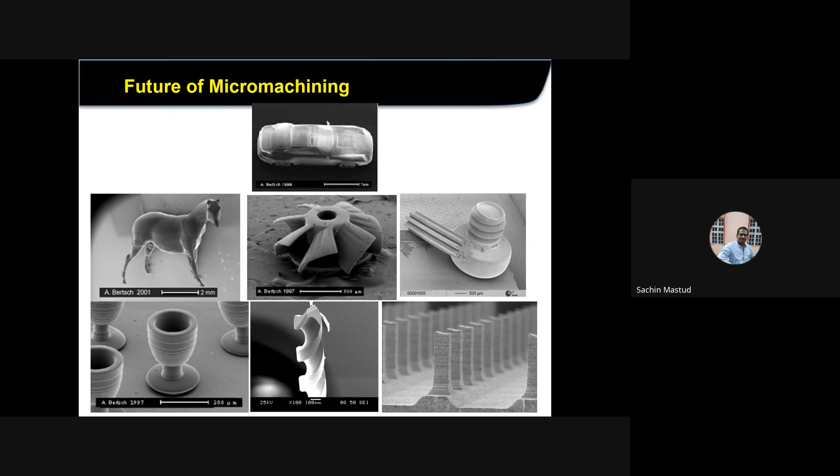The horse is not machined; it is fabricated by the MSL process on the photopolymers. These are also made by the polymers. These are also polymer. This is metallic. These are also polymers. Okay. A future of micro machining: this is the eye of the needle, and somewhere here the feature is created, and if you zoom on the feature it is like this. So this is the future of micro manufacturing, micro machining, where you can create such beautiful features.

And in the near future you will see that the size of the part itself is the tolerance on the part. As of now, if you have machined in the industry a shaft of a meter diameter, the tolerance on it is a few hundred microns, but here the size of the part itself is in the few microns. So in that case you can think of how much tolerance you will provide on that.

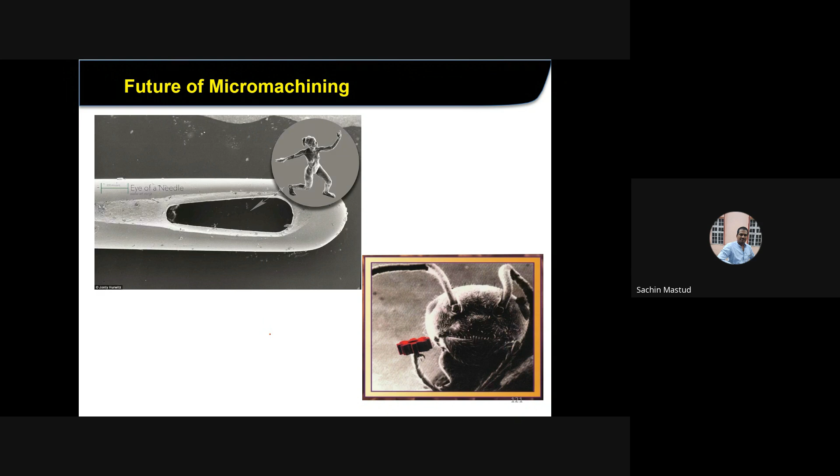So as of now, in some of the processes the tolerance has become equivalent to the basic size. So sometimes the part is made and sometimes the part is not made at all. That is the present status of micro machining. But yes, you can create a lot of features with this, and a lot of promising things are coming in micro machining. So the future is there, where the size of your factory would be your palm top.